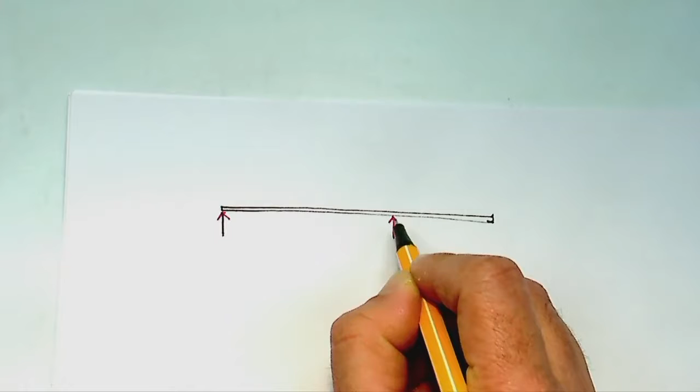Okay, let me start a problem. I'll put it in terms of symbols so you can change those. So let's say I've got a beam with two supports. Not two supports, I mean that's easy stuff - no, I'm talking about a bent frame, the one that looks like that R-looking letter, Russian. Yours one is coming next, I'm going to do his problem first.

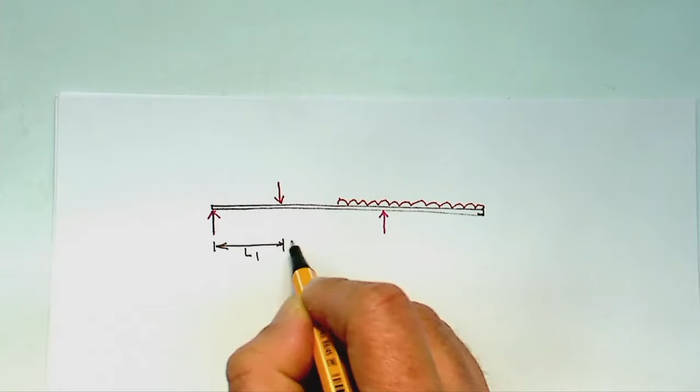So this is the Macaulay brackets for shear force. Let's put some load: a concentrated load here, and a UDL like this. Let's say the dimensions are L1, L2, L3 and L4, and let's say this force is F1, and that is Q per unit length. And these reaction forces are R1 and R2. Okay, is that a fair enough problem for you? Okay.

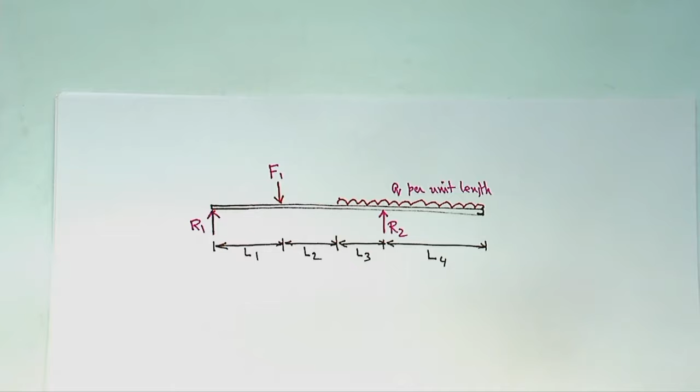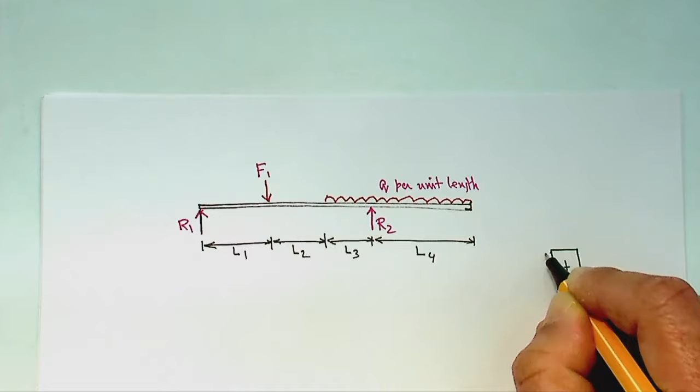So we are going to do shear force for this using Macaulay brackets. We'll use the sign convention for shear force as follows: positive shear force is left side going down and right side going up. So that's the positive shear force we'll be using.

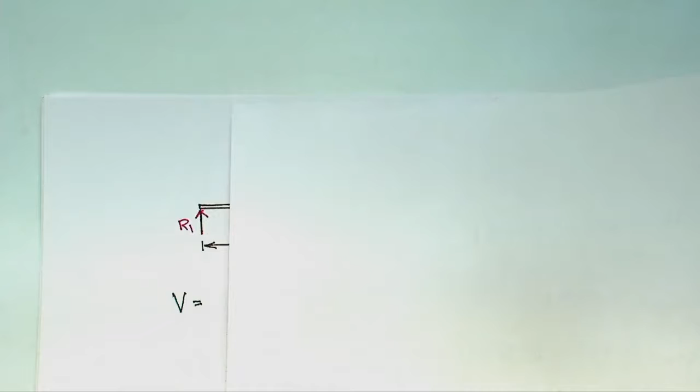So if we take x up to this distance, then we have only R1 if x is in between this, and that goes upward. So the shear force expression V would be R1 going up on the left hand side, so that is negative - minus R1. That would be for any values of x along the beam, so R1 would be there, that's just the shear force, and it's negative R1 because the left side is going up rather than going down. Is that okay? Okay. Next is when we go beyond L1...

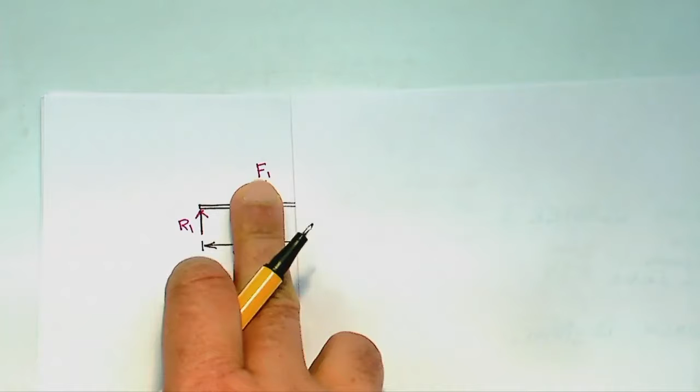...then I'll get F1. Again remember the sign convention: positive sign convention for shear force is like this, so left side going down for F1 means shear force is positive. So F1 is positive. But F1 is only valid for x greater than L1, because if x is less than L1, F1 doesn't come in. So we'll use Macaulay brackets x minus L1.

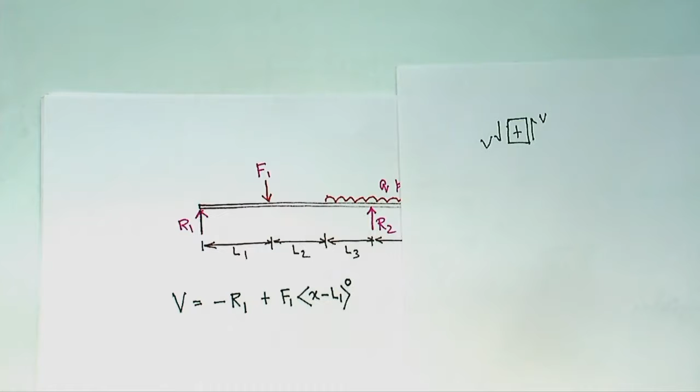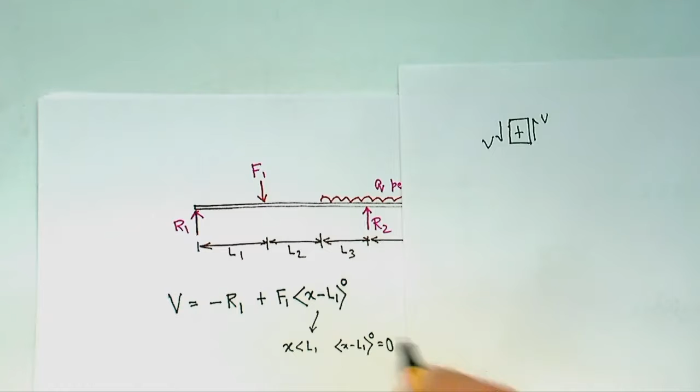Now there is an issue here because this gives the shear force as force times distance, because if x is more than L1, then that would have some positive value there, but that's not the case. So what we need to do is put a power of 0 over that bracket. That means this part is 1 if it is positive. If x is less than L1, then that is 0, and if x is more than L1, then that is 1. So for x less than L1, this would be 0, and for x greater than L1, that would be 1.

Okay? You raised your hand?

Now, if we go beyond L1 plus L2 going up to here, then you have got some amount of UDL coming into picture. The UDL is given as Q per unit length. So if this distance is now x, the UDL is acting over a distance of x minus (L1 plus L2). So L1 plus L2 over there, and the total distance is x. The UDL is acting over x minus (L1 plus L2). So this is the Macaulay bracket, and that is times Q. So that should go into the expression here: plus Q times x minus (L1 plus L2).

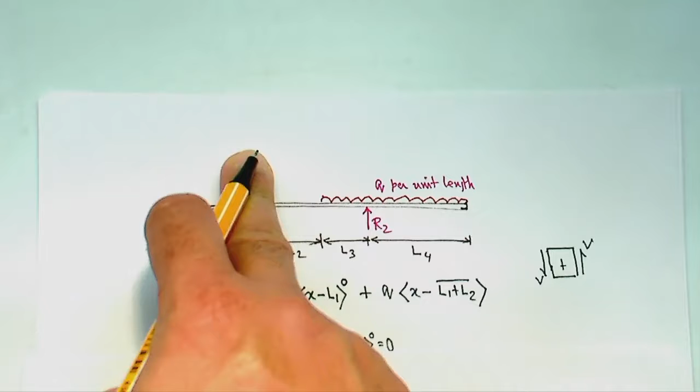Now here we will not put it to the power 0 because we need the value of x. That will give you the total load, so that will stay as it is, not power to the power 0. Because here it was already a force, this is shear force. F1 is already a force. When the force is given as UDL, UDL intensity times some amount of length would give you the force. That's why we don't put it to the power 0.

And then when it is beyond L1 plus L2 plus L3, R2 will come into the negative direction. So that would be minus R2, and distance is x minus (L1 plus L2 plus L3), and this time of course it would be to the power of 0. So this is the shear force diagram using Macaulay bracket.

What is that line above L1 and L2? Oh, that is instead of—so this is nothing but that combined together. Yeah, you could have put a bracket there as well. So it is x minus L1 minus L2 basically. Instead of that, you could put a little bracket there.

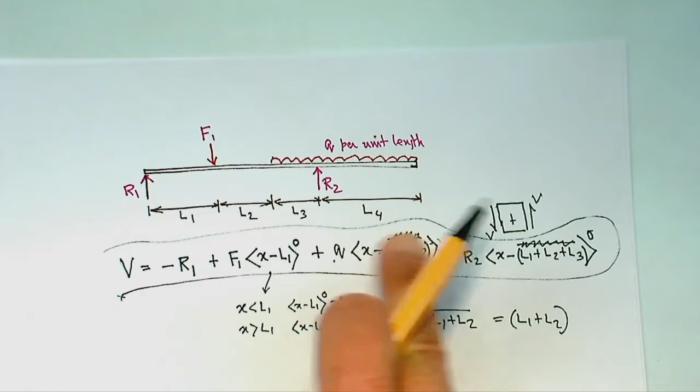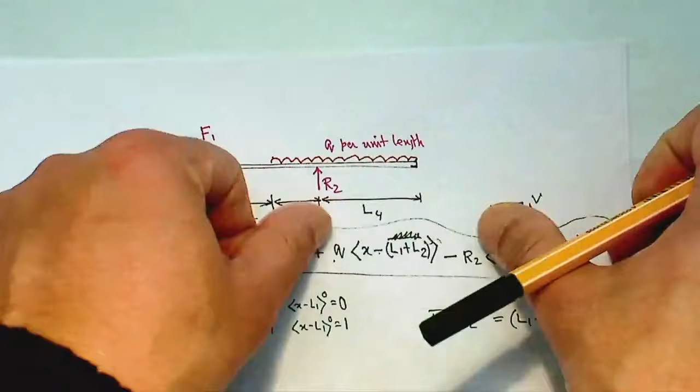Because the load for uniformly distributed load is the load intensity times the length, Q is not itself the load. So Q times the length will make the load. So we need this value here, if it is positive, to make it the load or a force. Whereas F1 is already a force. If you put that, not as to the power 0, this will be a moment, not a force. Whereas here, Q times the length is the load or the force. Is that okay for you?

Yeah, okay. So if you then integrate, then of course it would be to the power—now you don't integrate this shear force, so moment will come like this. So if you had a moment like this, for example, if you had moment M like this, then in the moment expression you would get to the power of 0.

So if you write down the moment expression for this case, how will it be? Now moment, we take positive as this is positive moment. So the bending moment in this case would be R1 creating, R1 times x, a negative moment according to this sign. So minus R1 times x. Now there is no moment until x is more than L1.

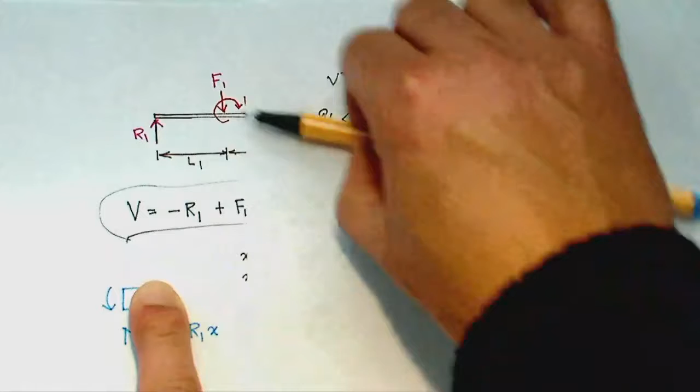So when it is more than L1, then F1 will create a moment in the positive sense, because on the left side it rotates in this way, which is the same way as it's shown here. So it will create a hogging moment. F1 will create a hogging moment. So that would be plus F1 times x minus L1.

Now this will not be to the power of 0 now, because this is a moment expression. We need force times the distance. So when x is more than L1, F1 times x minus L1 would be the moment. So that is not to the power of 0. But a concentrated moment is acting at that point.

And it is acting on the left hand side in the negative sense. So we put M times x minus L1 to the power 0, because otherwise we are multiplying moment with again a length. So if there is a concentrated moment, the bending moment expression comes with a Macaulay bracket to the power 0. Same way as the shear force, if there is a point load, that comes in the Macaulay bracket as power 0. So the moment will come with a 0 sign now.

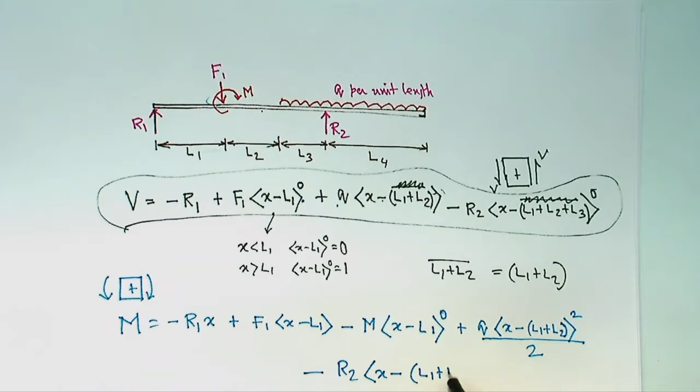And then Q is in here, so exactly—that will create a clockwise moment. So Q times (x minus L1 plus L2), that would be the load, times this squared over 2, because that would be the distance. So that is the moment due to the UDL. Similarly, R2 is in the opposite direction, so minus R2 times x minus (L1 plus L2 plus L3), not to the power 0 anymore, because we need to calculate the moment for this case. So this is the moment expression, and to the power 0 will come when there is a concentrated moment.

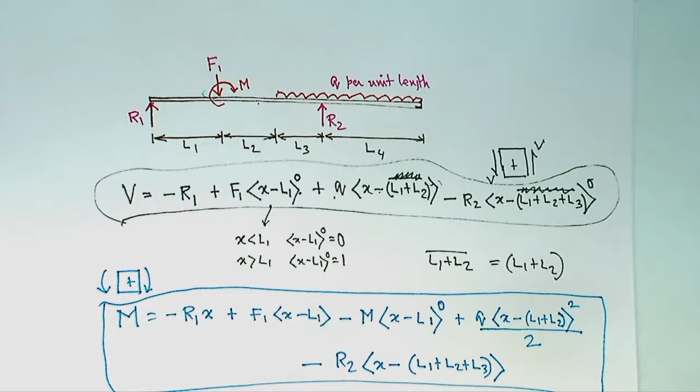So now if you vary x, for example, put x equal to 0 to L1 value, then all these right hand side terms would be 0. So it will be minus R1 times x, which means it will come in this way up to this point.

So at the distance of L1, you will have this value as R1L1. And then when it comes to x between L1 and L2, then R1x plus F1 times x minus L1. So the slope will start to become less negative, right?

So either it could go, depending on the value of R1 and F1, either it can go this way or it can be less negative, let's put it that way. So depending on the relative value, it can go along that, or along this. Anyway, it will definitely be less than that slope.

And then again, if you put in the values, x is greater than L1, so that bit is also negative, so you need to put in the values of m as well. So you go on putting these values, and treat those brackets so they only give you positive values. If there is a positive value, that's taken as the value, or if it's negative, then that's 0. You can put this expression in Excel with an if statement, for example, and that's how to calculate it. Without the figure, without the values, it's difficult to draw it now, but that's the process.

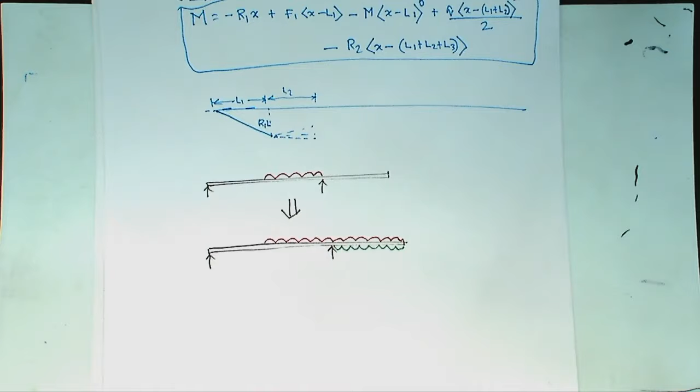So if it is a triangular load, then what will happen? So if you have got a beam like this, and you have got a triangular load, let's say from here to here...

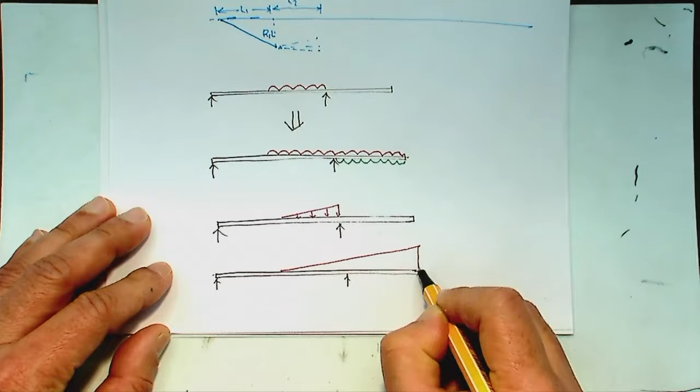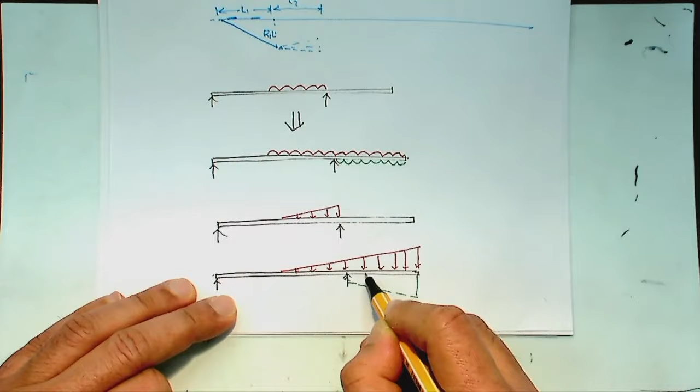Then what you need to do is, again in this case, because the expression you write will assume that the load continues with the same slope or the same relative intensity, like this, and then you subtract the bit of load that was not there.

So if the load stopped before the end of the beam, you need to take this into account this way. You assume your load continues till the end of the beam, then use Q times whatever x minus, etc. And then you put another one which starts from that point to the end, so that the effect of these two are nullified. Same thing with the uniformly varying triangular load.

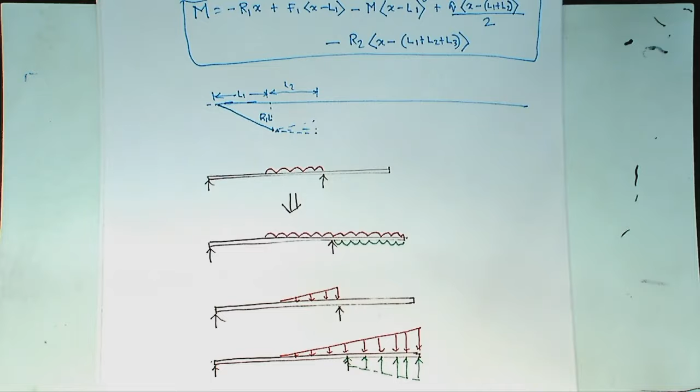Is it okay? You can expect to write an expression for shear force or bending moment using Macaulay brackets in the final exam.

So the way I'll be doing it is possibly similar to the one you did in the last test—not that exact problem, but something else in that way. Okay?

Is this fine? Okay, let me get to, what did you say, a frame problem, right? Yeah, okay.

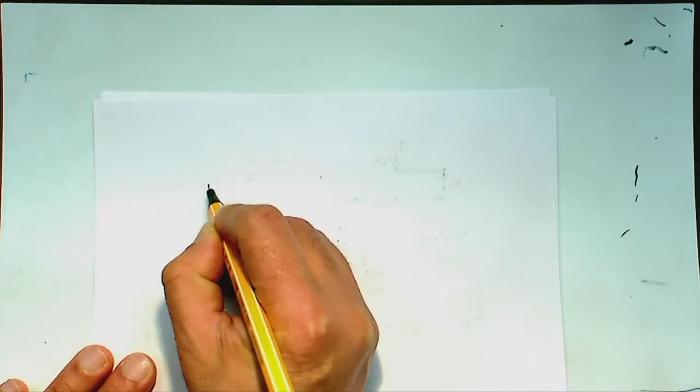So if I have got a frame, let's say I have got a frame which looks something like this. Something like this. And you have got a load at the end of it.

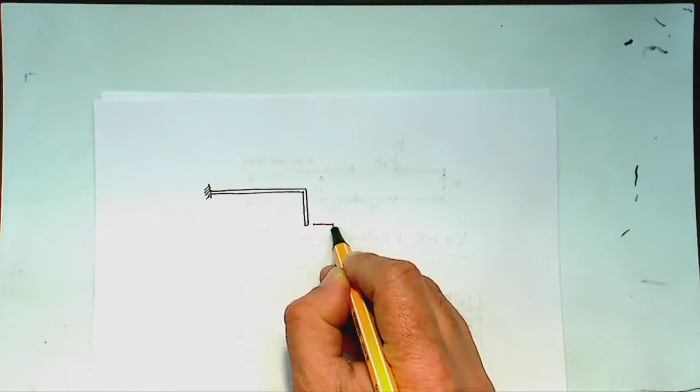Let's say the load is something like this. Okay.

So how to draw the bending moment and shear force - let's give a name to these parts A, B, and C, and let's say this load is F, and the distances are L1 and this is L2. Let's say these are the distances.

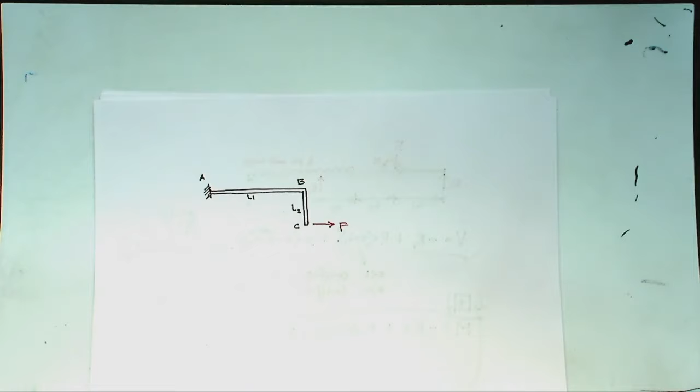So one thing you need to note here is there are two members, AB and BC. And this is sort of what is called a cantilever frame. Now you can draw the free body diagram and then start drawing the bending moment, shear force, axial force diagram in this case.

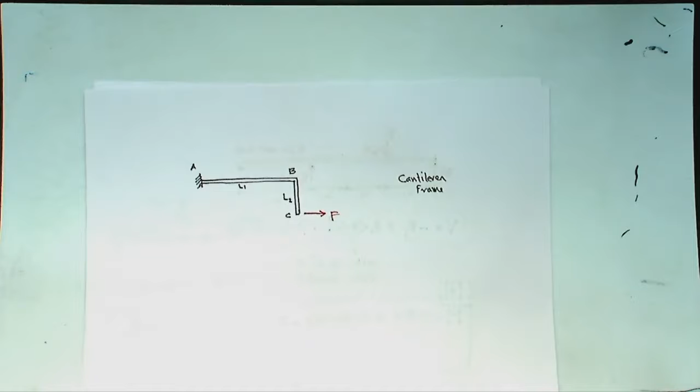Or as it is a cantilever, it's often easier to draw from the free end. So if the free end is C, then you can start drawing for the free end. So what is in the free end? You have got a length B to C and a force F.

So I'm just drawing the free body diagram of part BC. So what would be its equilibrium? Free body diagram means we have to satisfy the equilibrium.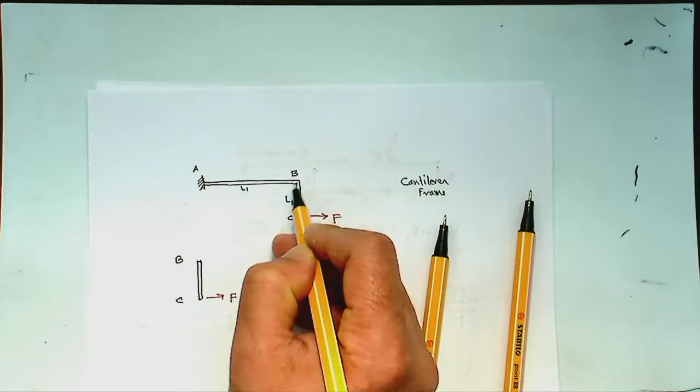So at that corner where I have cut from A to B, I would expect there would be a shear force going that way to resist that force, and that should be the value of F. And this also creates a moment, clockwise in that sense, anti-clockwise. So that must be balanced by a moment at that point as F times L2. Then this whole thing is under equilibrium.

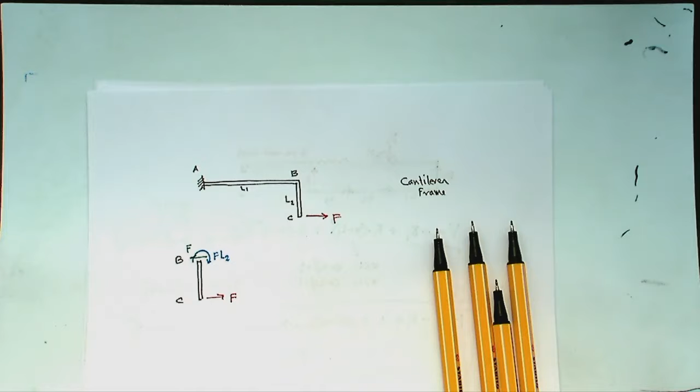So drawing the shear force, bending moment and axial force diagram next is easy. So if I draw it along this way, axial force, normally given by N. So there is no axial force for this part - that's 0. Axial force is 0 along this member, no force is acting along the length.

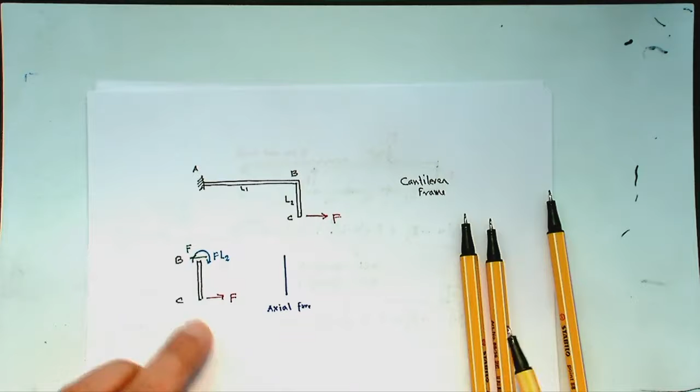So what about the shear force? Now shear force, you can see, is going along this way. So for F, it's continuous along this part. So this is F. This is the shear force.

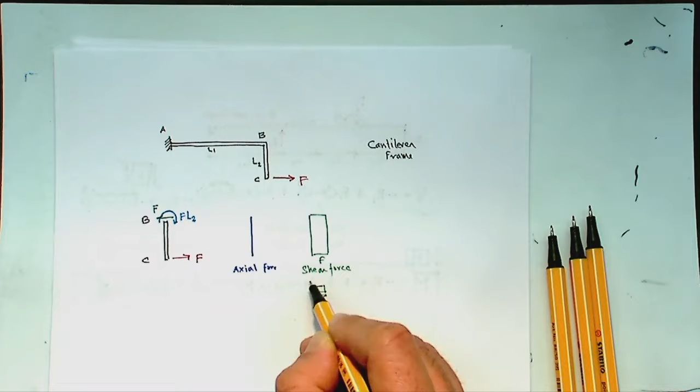Now whether that is positive or negative depends on whether you look at this part in this way or that way. It depends. You could choose either, and you could say, okay, my shear force is positive in this case - I'll take this shear force as positive, for example. This is the positive shear force diagram. So if you do that, that's positive in this case. So you can choose which way when it comes to the frame.

What about bending moment? Now bending moment, there is a choice that people make, especially coming from industry, that what they use for bending moment is to draw it on the tension side of the beam. What do you mean by the tension side? Now imagine this is the part BC and you are putting a force F at one end.

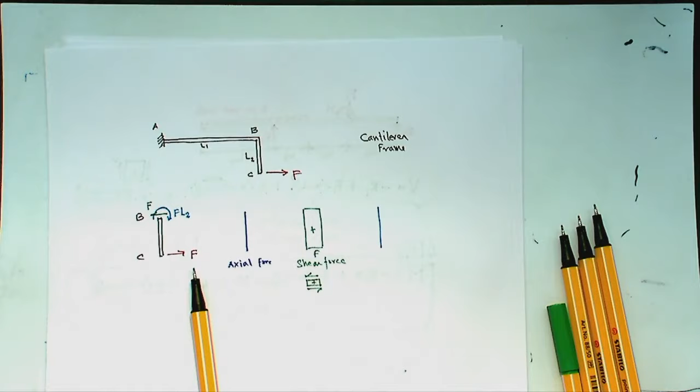So it is like this, F at one end is like this. So if you put a force in this part of the frame, it bends in this way, right? So if I am holding - you said this is the part BC, I am holding it, so my finger is point B. And I am putting a load F in that direction. How does it bend? It bends in that way.

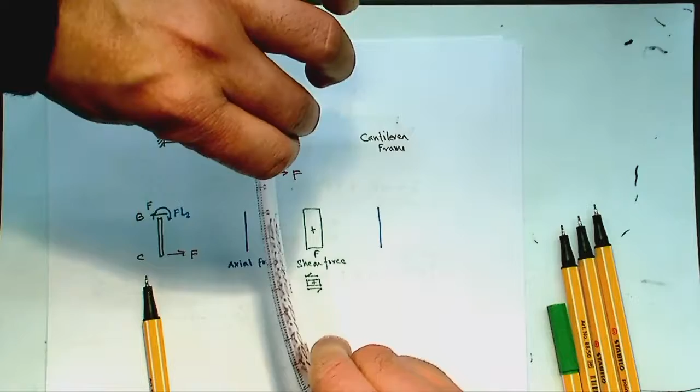So if you consider a detailed view of it, this side, the left hand side, will have the tension, and the right hand side will have compression if it bends in this way. So the right side fibers will come closer, and the left side fibers will extend. So the tension, if it bends this way, tension is on the left hand side and compression is on the right hand side. So the industry standard is to draw the bending moment on the tension side.

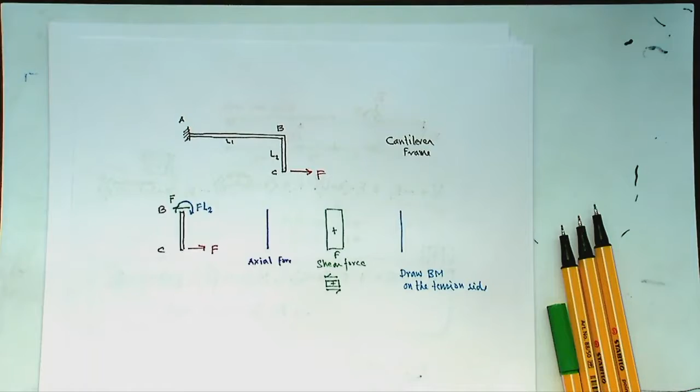So if you see the beam problem that we have done, I have chosen the sign convention for the beams, so this sign convention for the beams will match exactly. So my sign convention for this one would definitely show you that the positive moment is drawn on the positive side.

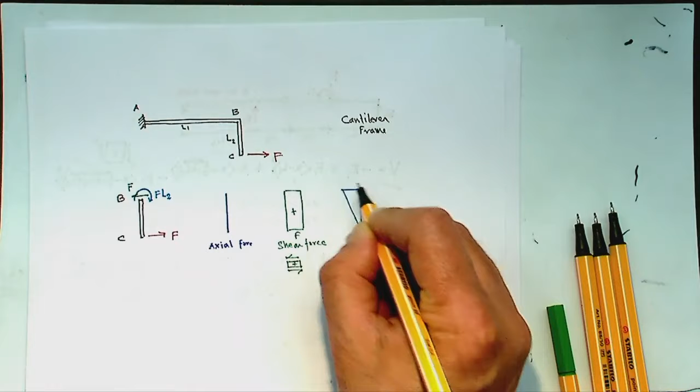So on the tension side in this case. So draw bending moment also, left hand side is the tension. So as you go up, your F times X - how should the bending moment feature in? So if you go up, your bending moment will increase, F times X, until it becomes F times L2 at that point. So tension side is in this direction. So I'll put that as a straight line going to F times L2 at that point. So F times X is equal to F times L2.

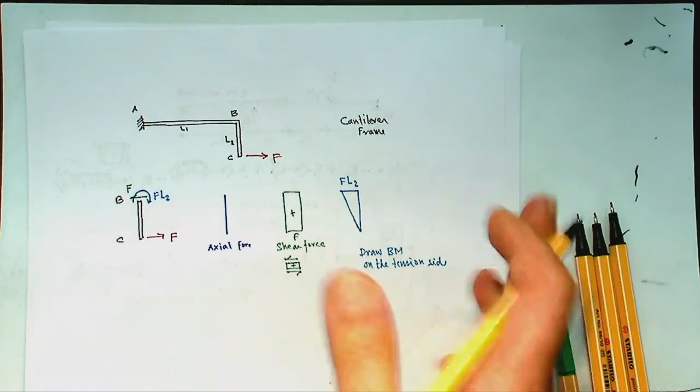So that is just drawing on the tension side. So that is nothing positive or negative we say when it comes to the frame, because which side is up or which side is down - you may say, okay, I'll put it in this way. Now what happens if the frame was something like this? This is the frame.

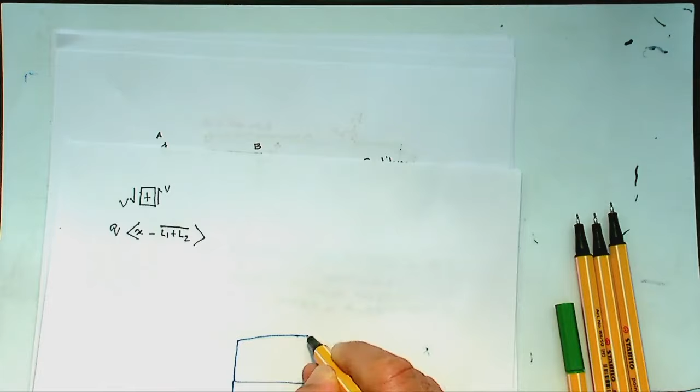Then if you say this beam is positive that way, what about that one? Outside positive, inside positive - and if you have got another story, what happens to this one or that one? So in industry, and in a lot of software, they use bending moment diagrams drawn on the tension side for a frame.

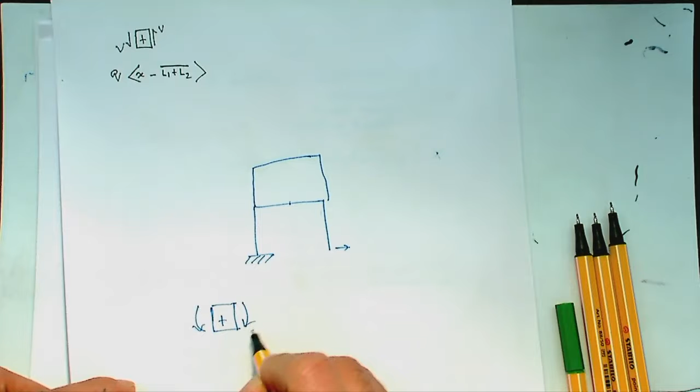The sign convention I have chosen will automatically satisfy the tension side for the beam - this is the positive sign convention for bending moment. Now if you have a simply supported beam under a point load, the bending moment according to our convention is like this, so we are already drawing on the tension side. The bottom side will be under tension, so that's what we are drawing. This sign convention automatically satisfies the tension side problem we are doing. So that completes part B to C.

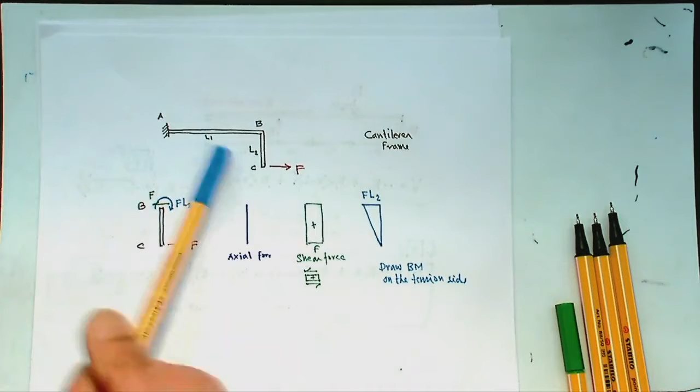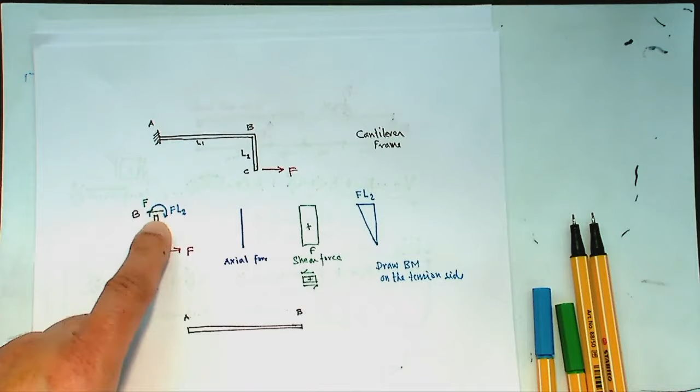What about part A to B? Now let's draw part A to B here. At joint B, this was the case - you had F times L2. So for part AB, at joint B, the reaction would be equal and opposite.

Why might you ask? Let me draw this with a little diagram. Say I am drawing this part again - part B to C. This is point C, that is point B, and I have got force going through, so this is force F, and then shear force going in this direction as F, and a moment acting here as F times L2.

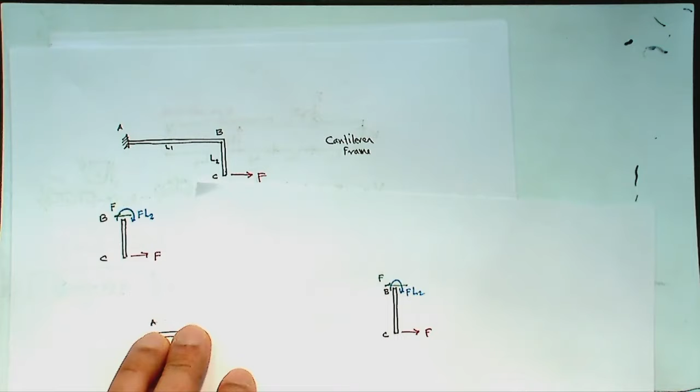Now this is connected with the joint here - let's say this joint is something like this, joint B for example. And that is connected with part A to B over here. So I've taken a joint and separated it out. According to Newton's third law, that's action and reaction.

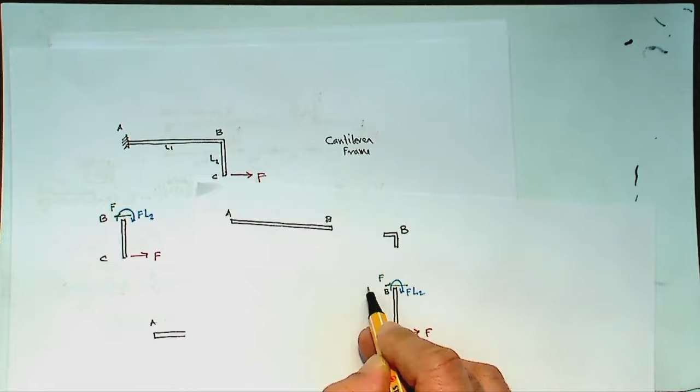So if F is going at the end of this vertical member going right to left, then on the joint it should go in the opposite direction, because these should match equal and opposite at the end of the joint. So this should be F here, and this should also be in the opposite direction, so that would be F times L2. What about the other end? This is not in balance, so this should be F, and the other way around, F times L2, so that this is balanced.

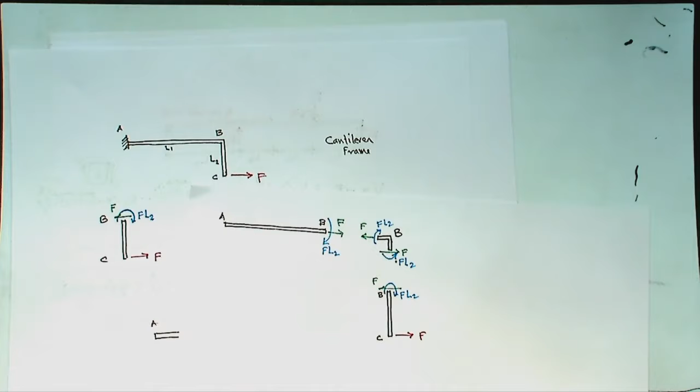Now what about the end of the horizontal member? You would expect F in this direction, and F times L2 under that direction. For completeness, doing the equilibrium of this part, it would be F on this side, and this F carries on as an axial force. There is no other moment but to carry this as F times L2.

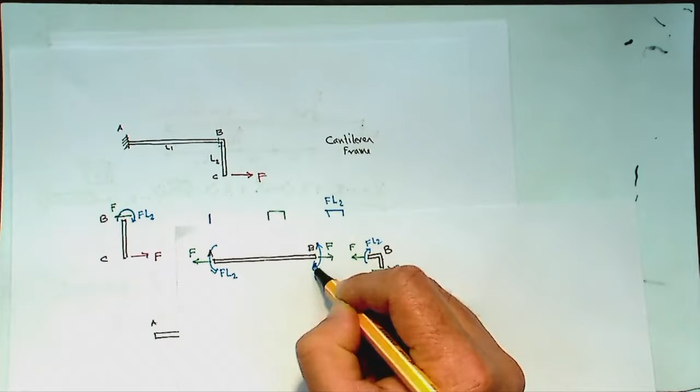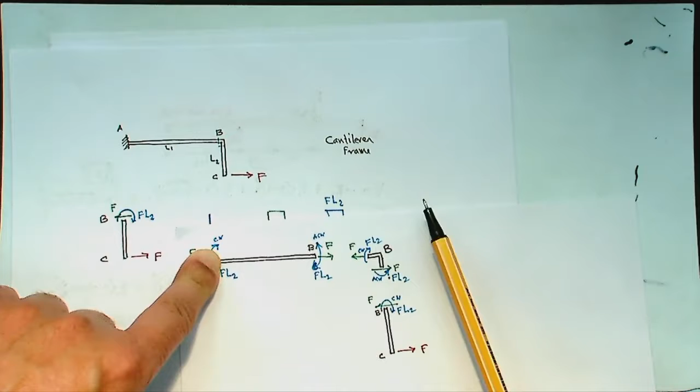Go on - shouldn't the moment on the right side be transferred? Because in this case both moments are in the same direction. Yeah, because over this joint, what I've done is cut in here, for example. I meant at end B of green maybe. Here - okay, there the moment should be the other way. Oh yeah, thank you. So this is what - clockwise? Thank you so much. Wait, how, wasn't it already clockwise beforehand? Oh right, yeah sorry. So this is clockwise, this is anti-clockwise. This is clockwise, that is anti-clockwise, and that is clockwise. And it also makes sense that if F is there, that will create an anti-clockwise moment, so that must be balanced by a clockwise moment.

So this is the free body diagram of part AB. Part AB's free body diagram is F, and you have got a moment which is F times L2, and in this case also F times L2.

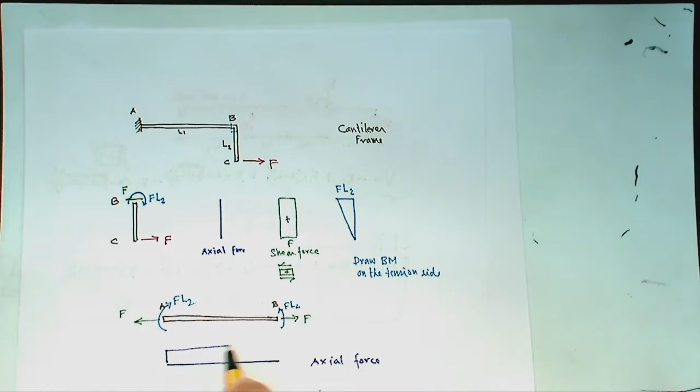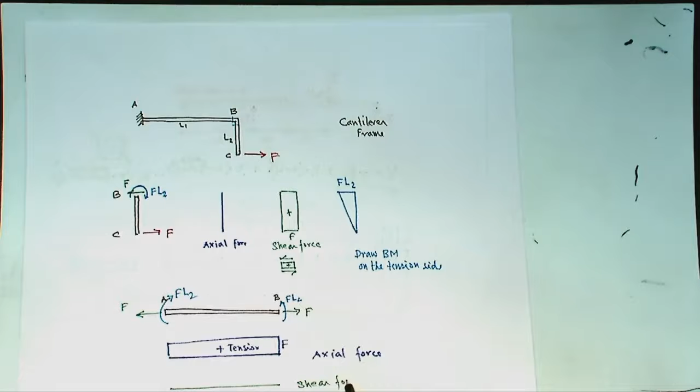So we can draw the shear force and axial force diagram now. The axial force diagram - axial force is in tension, and tension we normally say is positive, so this is tension, because F is extending that. What about shear force? There is no shear force because there is no force acting perpendicular to the axis, so the shear force is zero.

What about the bending moment? Now bending moment is in this direction. This would bend in that way, so this is a hogging moment. According to our sign convention, this is negative, and if we draw on the tension side, this would also be negative. It's constant - if you try with F L2, there's no load in between, so it's a constant bending moment under it. So drawn on the tension side, this is the bending moment.

So that completes the shear force, axial force, and bending moment diagram for this case.

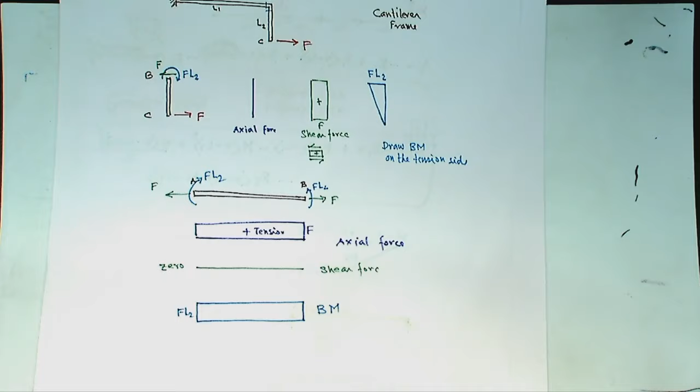I wanted to ask for the solution of question 5 because I'm confused by how it looks - but if the cantilever was standing on its cantilever root, would it be the same thing? Exactly the similar thing. Now of course, if the load here is downward, then that would have axial force and no shear force, and no bending moment in this part. However, here it will have shear force and bending moment.

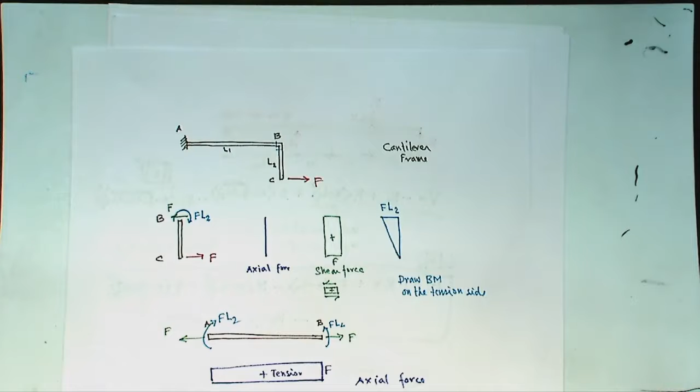So the bending moment diagram for a cantilever frame shaped like that must bend, with a force acting on that bend. If you join these two, sometimes people do it as a jointed one.

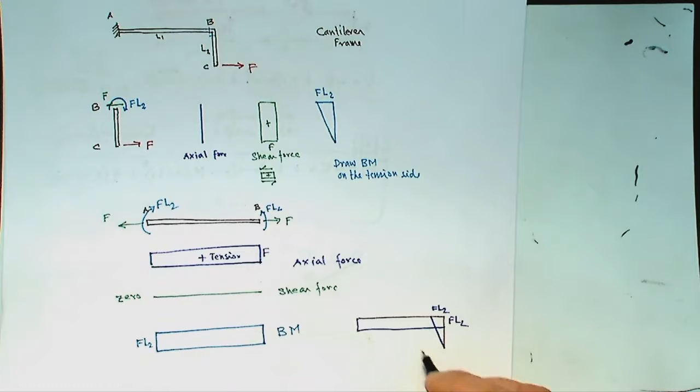So if I draw the whole frame, how would the bending moment diagram look? It would go like something like this, and that is F times L2, and then F times L2 over there. So this is the bending moment diagram for the whole frame, like that.

Wait, so if we were given a bending moment question in an exam, is that how it would look - the bending moment diagram for the whole structure? Yeah, whereas here I have drawn them in two parts.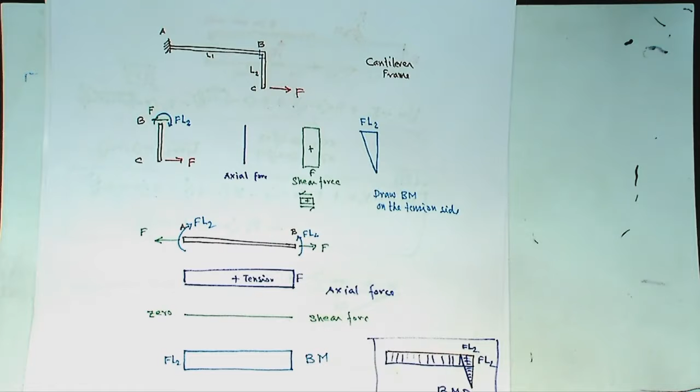Is that your question? Yeah. Should we draw them as separate parts or as one whole diagram? It depends on the question, but mostly if you do either way, that's fine.

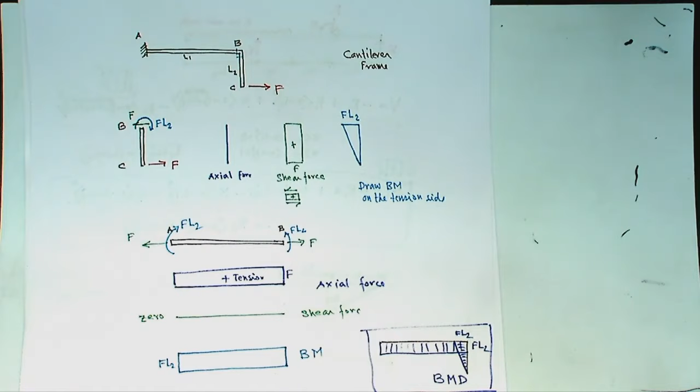Either way is fine. Now normally you should get into the habit of drawing as a complete one, because that way it is much more complete in that sense, so you can see the whole frame and draw the bending moment diagram. But to start with, it's better to separate it out, so that it increases your understanding, and then join them together. But once you get proficient with equilibrium and free body diagrams, you don't even need to go through all this step - you can draw completely from start.

You could say, okay, I have got this frame and I have got a load, so I'll start drawing this in this way. Which way is it going? It's going - as I go up, my moment is going to increase linearly, so it will be a linear curve like that. And which side do I draw, this side or that side? Now this should bend in this way, so I'll draw it in this direction.

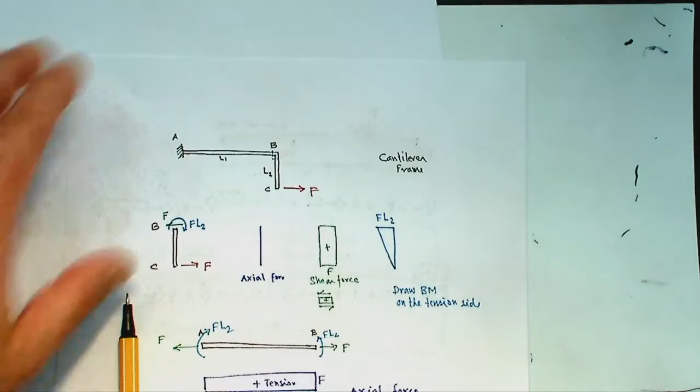And when I am at this point, the moment is maximum, F times L2. Now if I start getting into this side, the moment does not change, because the moment at this location is F times L2, and the moment at this location is also F times L2. If I go along this length, my moment value doesn't change, because the length or lever arm for the moment is the same, so the moment will be constant along that path. That's how you will draw when you get proficient with the idea of the free body and equilibrium.

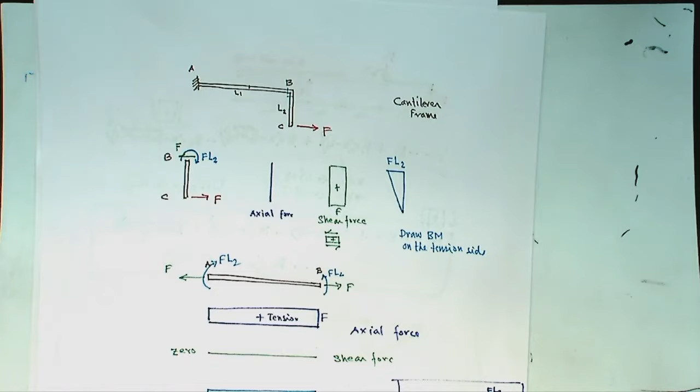Any other topic? I had a doubt regarding deflection - while assuming the deflection, it was mentioned that we assume there are no axial forces. So if there were axial forces, how would it affect the deflection? Yeah, if there is axial force, then of course the deflection should be affected, but this is what is called a second order effect, which you will learn in second year when you do buckling and tension structures, for example.

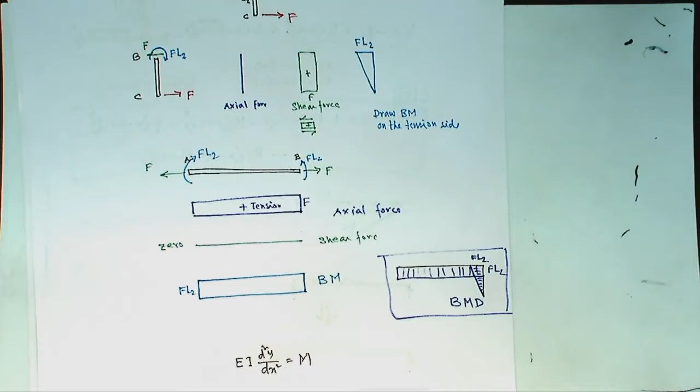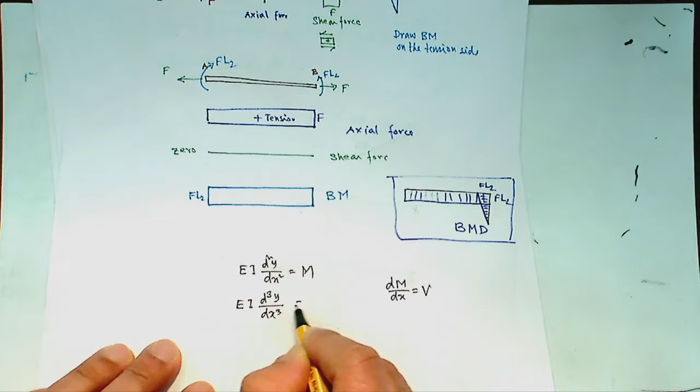So the equations we have done - if you remember, the bending equation is EI d2y/dx2 equals bending moment. Now if you do two more differential equations, because dM/dx is equal to V, if you differentiate it again, you get EI d3y/dx3 equals V. You also know that dV/dx is equal to load, so if you differentiate again, EI d4y/dx4 equals load.

Now if you have got the axial load into it, then N times dy/dx would be added into this load, where N is the axial load and dy/dx is the slope. So then it's a complicated differential equation - it's a fourth order differential equation, and you need to solve that. But that would be essential when you do cases like buckling.

Okay, so that would be n times d2y dx2, etc. would be your load. Any other comment? No?

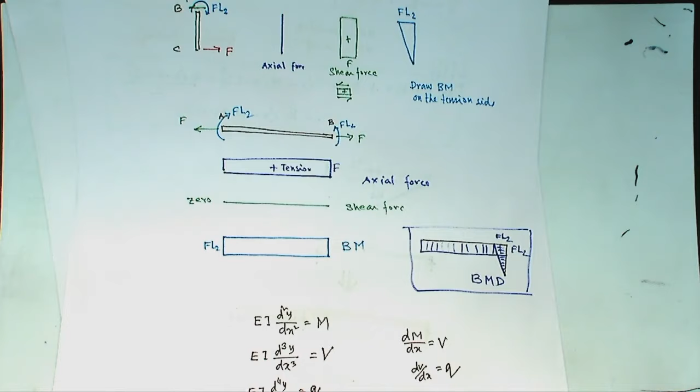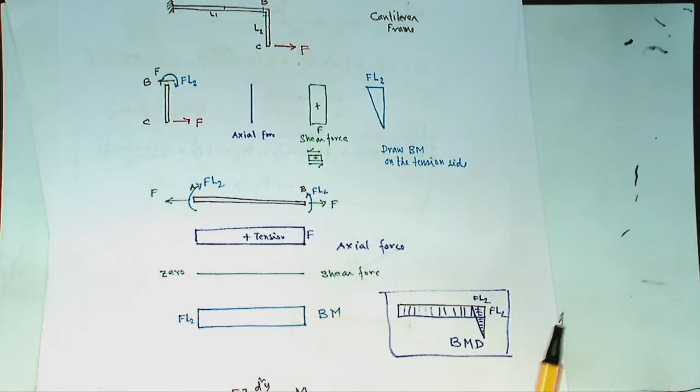Yeah, so that's why for a frame, people draw on the tension side, and then they get rid of the concept of whether it is positive or negative. So they draw the diagram on the tension side of the beam. You don't need to see whether that is positive or negative, whether it is up or down. There is a problem with vertical cases, for example, which side is positive, left or right.

So in the industry, they say whether my bending moment is bending the beam this way or that way. If it is bending in that way, this side is tension, because this side fiber would be extended. So I'll draw the bending moment on that side.

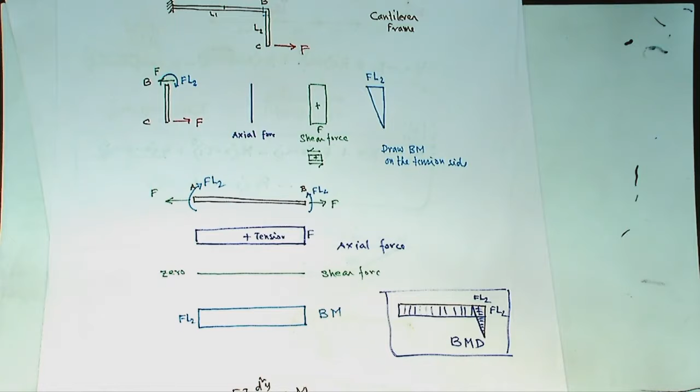It has also got advantages because some materials are weak in tension. For example, concrete has got very low tensile strength. So how do you use concrete? You put reinforcement, which will take tension.

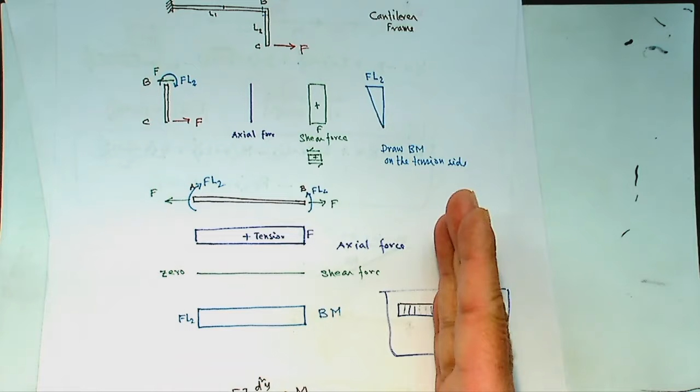So it is then easy for a contractor on the ground to see which side of the cross section your reinforcement should go, by looking at the bending moment diagram. In this case, if it was a concrete frame, you'll put more reinforcement on the left-hand side, because that's where the bending moments are - that's the tension side, and the reinforcement takes the tension.

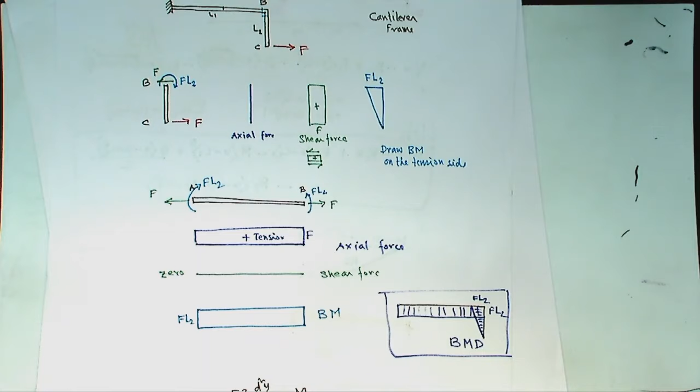For the group work, we had done a few calculations, but we could not include them in the main file. Could we add it as an appendix? No, everything is in there. I mean, we could provide a link. No, it's 2 pages. Could we use 2 A3s? No, 2 A4 or A3. What you could do, some people got around it by putting a video - they make PowerPoint slides and then make a video of that. So we can't submit a video and A3? No.

Anyone? Okay, well, when calculating the second moment of area of a cylinder using triple integration, can we do it in reference to the XY plane? Second moment of area is just for a flat surface, for an area. Second moment of area is not for a solid. No? No, because what you're talking about is radius of gyration - moment of inertia.

That is in mechanics, that's for the whole 3D body. But in this case, it's a plane section. Can't we though? What we can do, if, do it for a circular cross section, but we can't use this to calculate the second moment of area. Second moment of area is different to the moment of inertia.

Second moment of area is primarily for a flat axis, flat area, two-dimensional area. So in 3D, we cannot assume that - 3D is not useful here. What will come into 3D is something related to the moment of inertia primarily, which is a different concept. There it has got a definite mass, so you can use the same principle to calculate the moment of inertia, which will be used in mechanics next semester. But in this case, we'll assume it's a flat section.